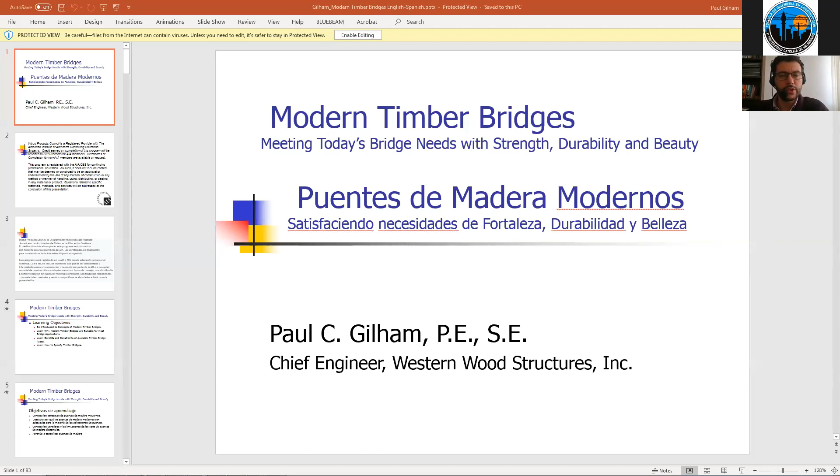Sorry, Paul, it's not sharing the screen yet. Sorry, I'm not... it's not yet. Okay, can you try again please? Okay, let's try this, screen share. Okay, good, can you see that? Yeah, yes, we can. Great. Now, do you see the full screen? Yeah, do you see it please? Not yet. Yes. No, no, not yet, it's not the presentation screen yet. Okay, I was afraid of that. F5, or, well, I have it on F5. I have two monitors, and the right monitor has the screen on it, but I think you're looking at the left monitor, are you not?

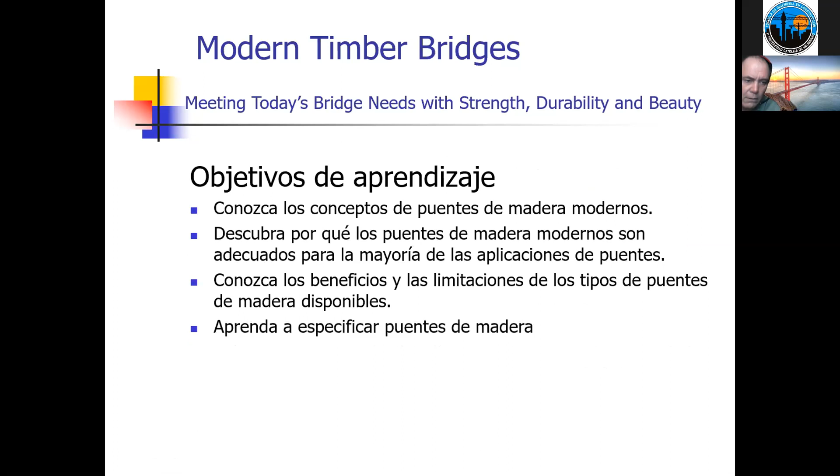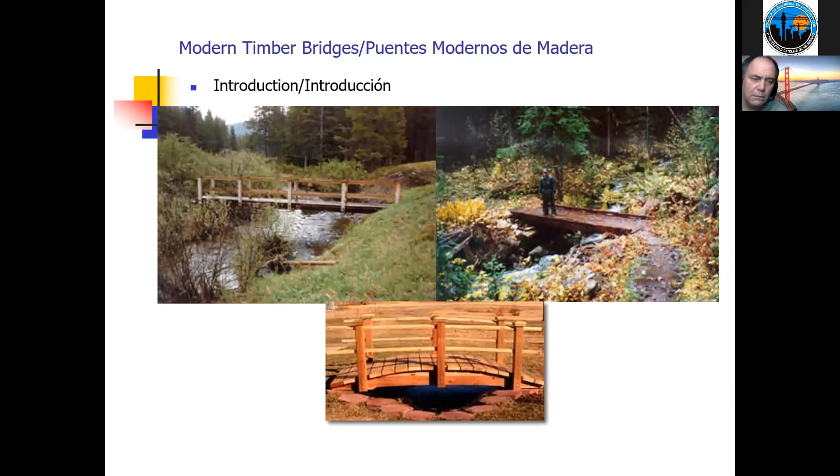The common perception of timber bridges is that they are limited to small trail bridges for light use, or a garden bridge ordered from a catalog. But several developments over the last 50 years allow us to go beyond these structures to bridges suitable for major highways. By developing new methods of construction and new materials made from our timber resource, a new generation of timber bridges has emerged that meets today's strength and longevity requirements for bridge construction. These are referred to as modern timber bridges.

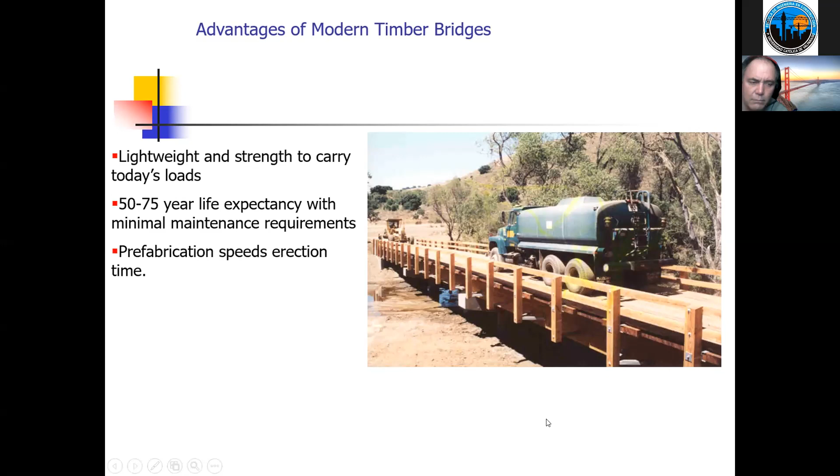Timber bridges have several advantages, such as a high strength-to-weight ratio, making them significantly lighter than bridges made with other materials. Modern timber bridges have a 50 to 75 year life expectancy, and we'll examine the procedures used to achieve this durability. Modern timber bridges are prefabricated before preservative treating, which greatly speeds erection times. These bridges are delivered to the job site like giant erector sets; the members are lifted into place and simply bolted together to form the bridge structure.

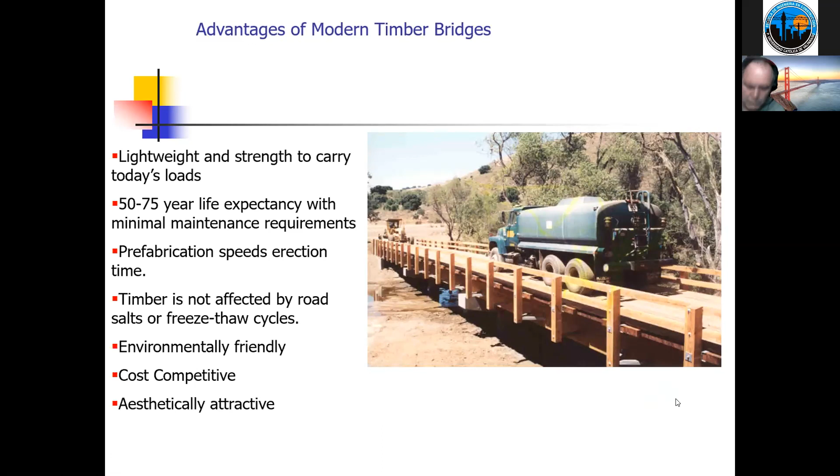Timber is not affected by de-icing chemicals, which can be corrosive and are not required, reducing maintenance requirements compared to other materials. Timber is the only renewable building material. In addition, the energy used to produce timber is significantly less than producing steel, and the amount of air and water pollution produced in manufacturing timber is far less than steel and concrete.

Timber bridges are competitive with steel and concrete on a cost basis, especially when the cost of smaller foundations is considered. No other building material has the inherent warmth and beauty of wood. The variation of tones and grain patterns make wood desirable for finishes, also enhancing the beauty of a timber bridge.

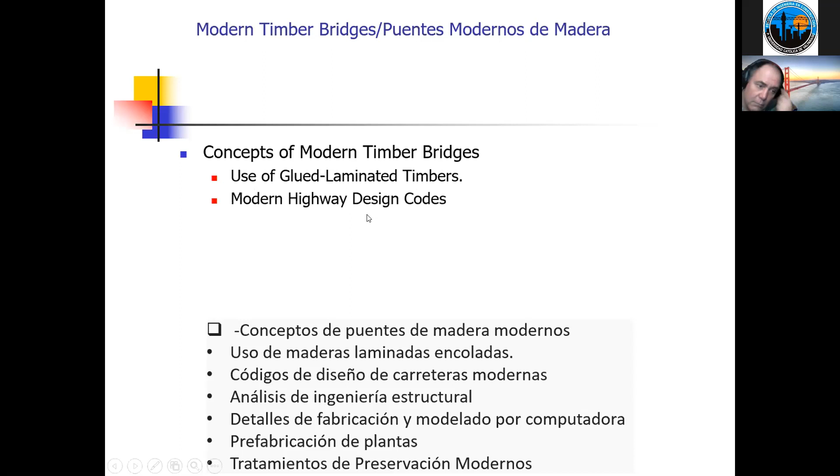There are 6 major improvements implemented in the design and construction of timber bridges that enable them to meet today's requirements for strength and longevity, while maintaining the charm and beauty inherent in timber construction. The first is the use of glue laminated timbers, or glulam. Glulam members are made with 50 millimeter thick laminations, between 100 and 300 millimeters wide, bonded together with waterproof adhesives to form longer members. These members are significantly stronger than solid sawn timbers.

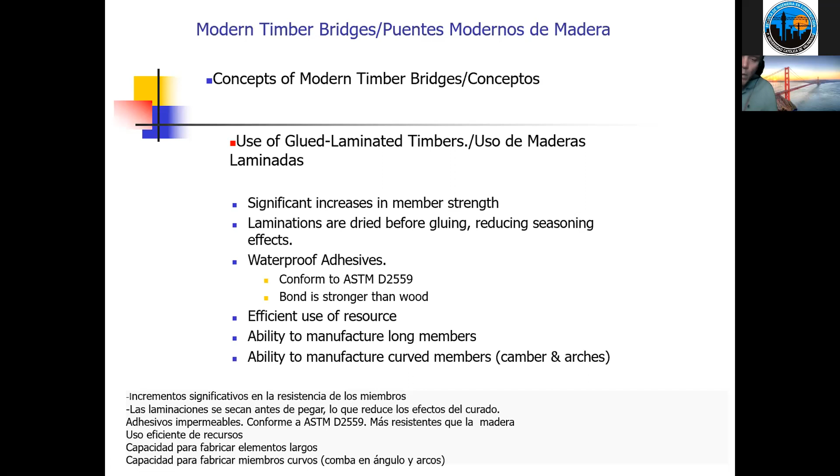We use waterproof adhesives that conform to standard D2559 of the American Society for Testing and Materials, and the bonds we make are actually stronger than the wood. It's an efficient use of resources, as the high strength material is only placed where the stresses are high. We have the ability to manufacture long members up to 35 meters, and the ability to curve the members to introduce camber or arches.

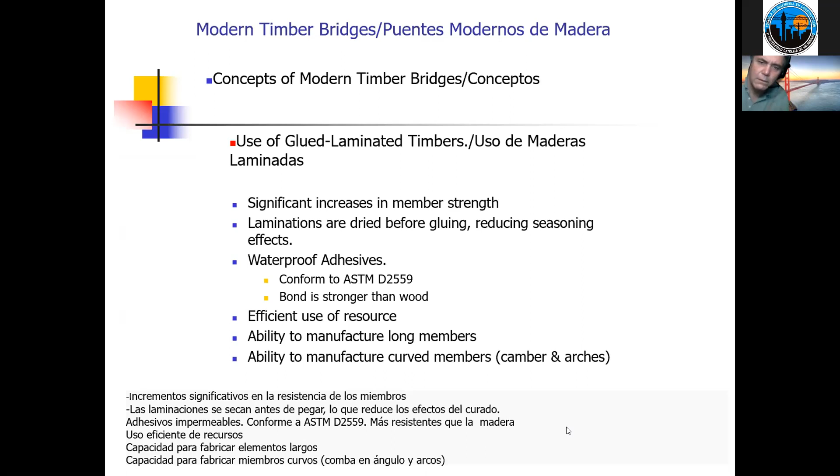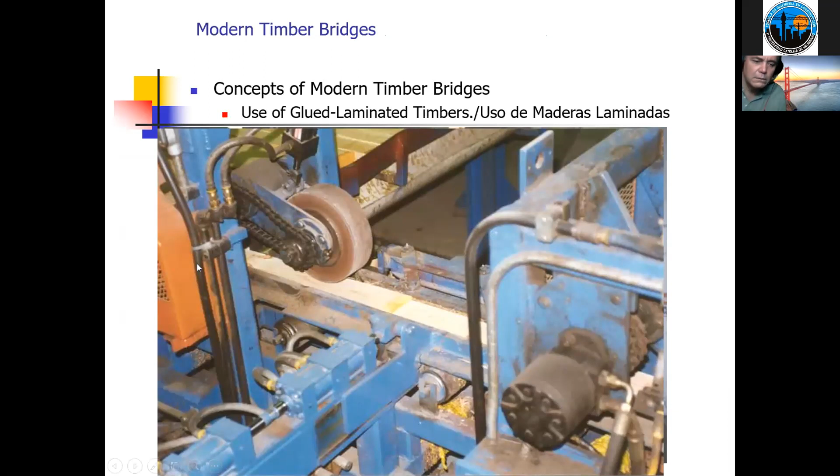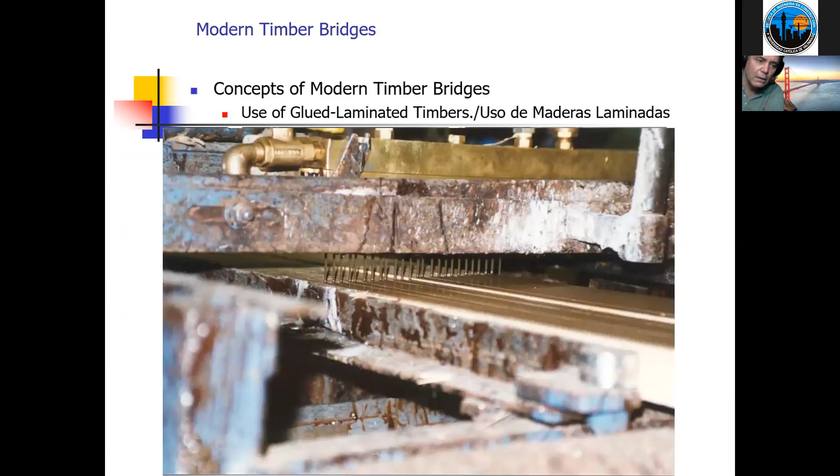In a glulam plant, the lumber comes in, is dried and graded. The individual laminations have a finger joint, cut into the end of the lamination. Those joints are assembled end to end to form laminations as long as the member needs to be. In the last step, face bonding adhesive is applied to the wide faces, and the members are locked up in clamps for the glue to set. Once set, the bonds are stronger than the wood itself.

Part of the concept of using modern timber bridges is that we use the same highway design codes as any other building material, so we're on a level playing field with both steel and concrete.

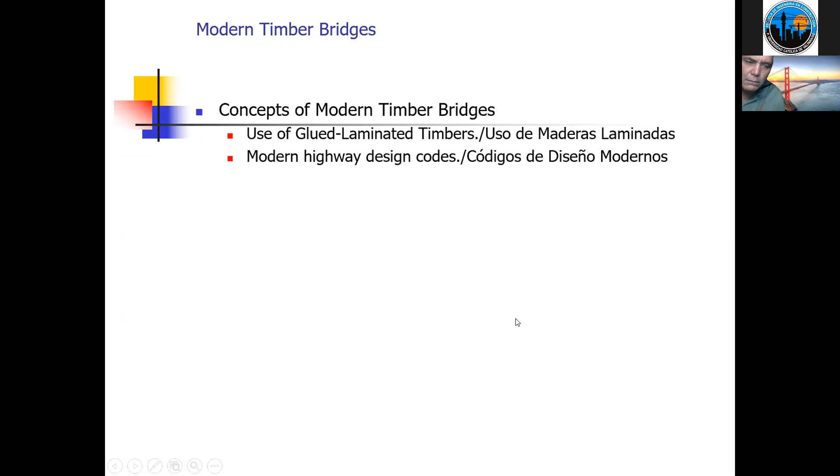In the United States, timber bridge design is governed by AASHTO, the American Association of State Highway and Transportation Officials, which currently uses the load and resistance factor design method, or limit states. Their design vehicle is the HS20 vehicle, which weighs 320 kilonewtons.

AASHTO also specifies how wide the lanes have to be, how loads are distributed to the individual structural elements, and things like wind and seismic loads.

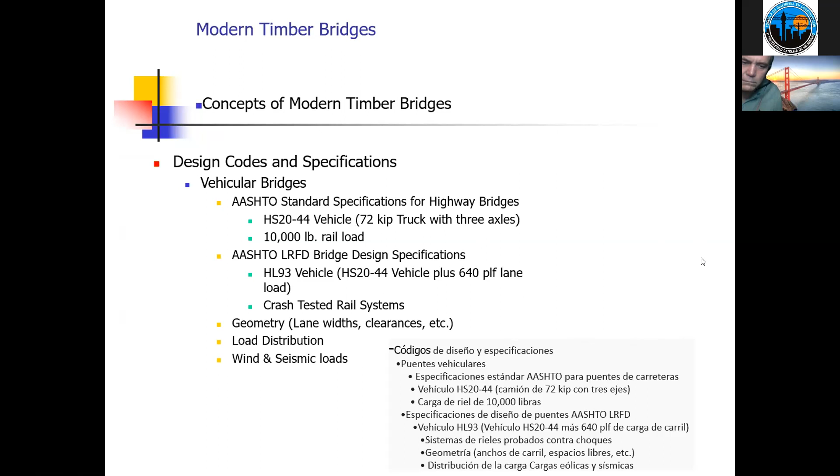So this is a truck on a normal bridge, which probably has 8 or 10 longitudinal girders underneath the pavement. AASHTO assigns a certain amount of the weight of this vehicle to a single longitudinal member, using the same distribution factors for wood as for steel or concrete.

One thing we're noticing driving down the freeways is that trucks just keep getting bigger and bigger. The standard truck is a 320 kilonewton vehicle plus a lane load of 9.3 kilonewtons per meter. That combination of lane load plus an individual truck accounts for the vast majority of loads applied to bridges, all specified in the AASHTO specification.

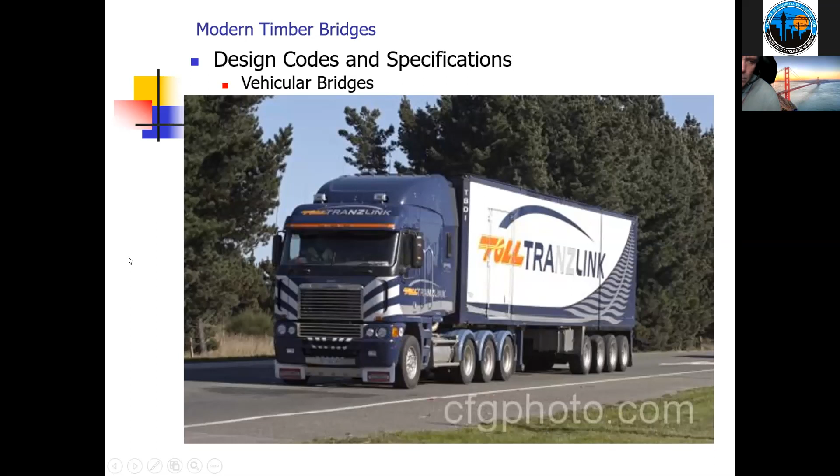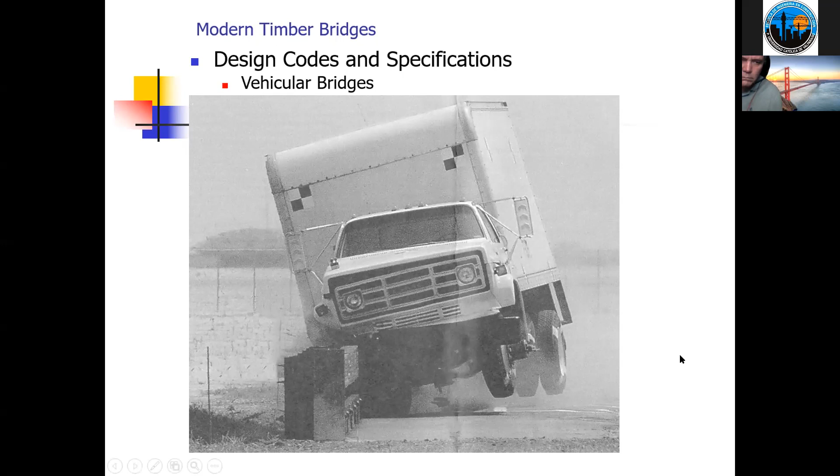Also required in the US for new bridges are crash tested rail systems. This timber rail system is designed to take the impact of a truck hitting it. Not only must it be designed not to break, but it has to have the right geometry so the truck doesn't roll over the rail, and when it reflects back into the road, it does not cross into oncoming traffic.

Not only are timber bridges used now for vehicle bridges, but also for pedestrian bridges. The AASHTO LRFD guide specifications for the design of pedestrian bridges is one of the two design specifications we use, requiring a 90 pounds per square foot, or 4.3 kilopascal, pedestrian live load.

Again, wind and seismic loading is governed here. And unless access is prevented for other vehicles, a 6 to 10 foot wide bridge has to be designed for a 10,000 pound truck. If it's over 10 feet wide, it has to be designed for a 20,000 pound truck. Plus, there are requirements for the rail heights, rail spacings, and the loading that the rails must withstand.

We break structural engineering analysis down into four categories. The first is the use of computer aided design, which allows us to optimize the design and greatly increase the effectiveness of our work.

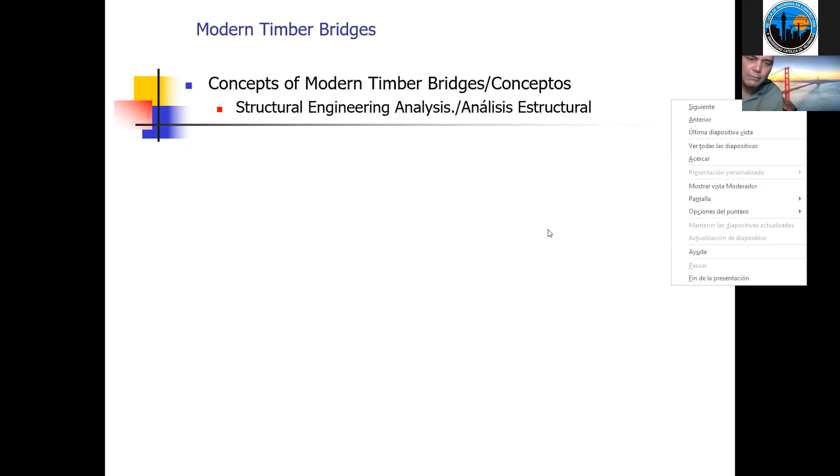What used to take 2 or 3 days now can be done in a few hours. Because we have that extra time, we can optimize the design by removing material where it's not needed and only putting the high strength material where the highest stresses are. We can also identify locations in the design that might have issues using the analysis software, which greatly reduces the time.

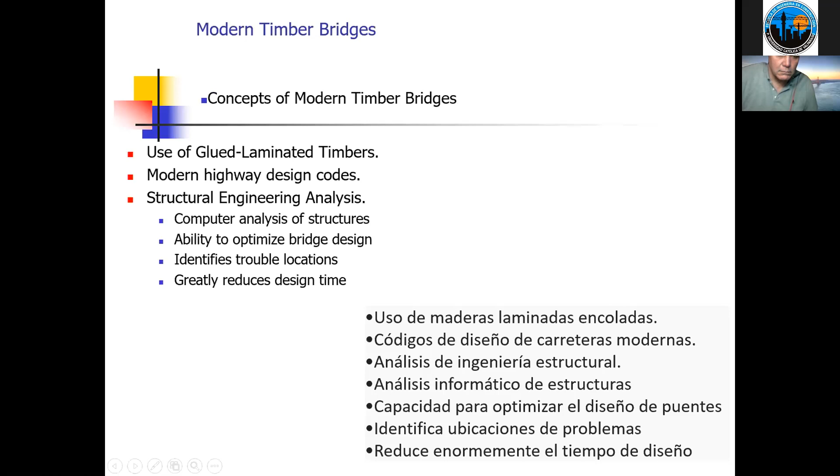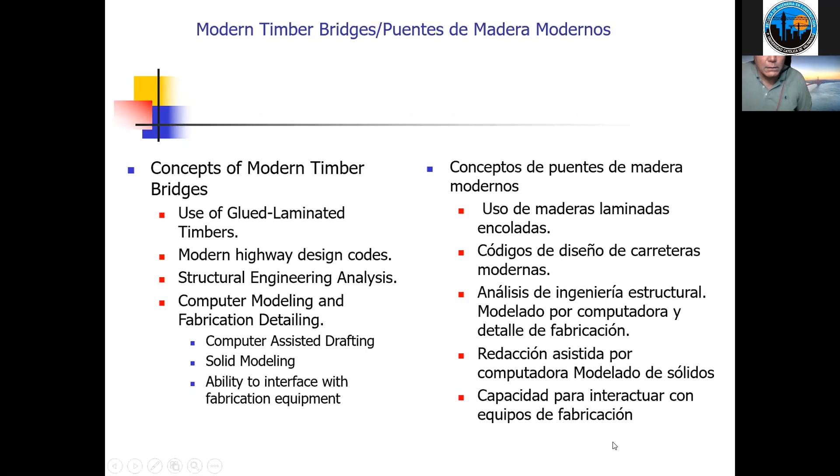We use computer modeling and fabrication detailing, including computer-assisted drafting and solid modeling of individual members, with the ability to interface directly with fabrication equipment.

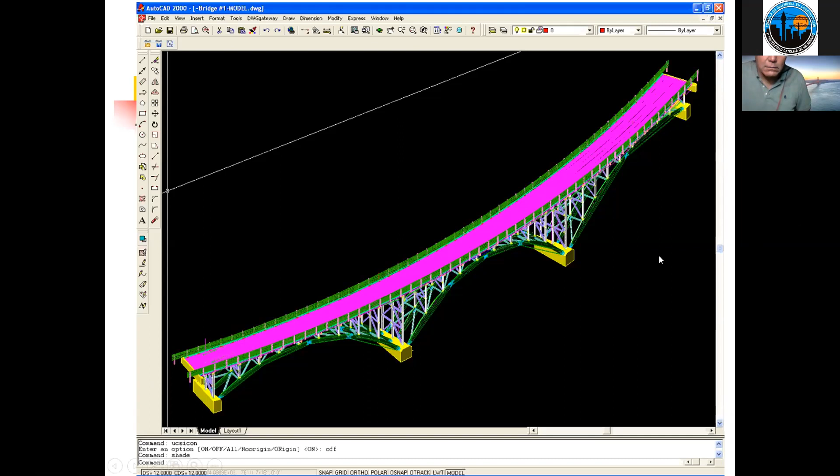If you look at this bent right here, we can extract that from the model, and we have the bent fully laid out.

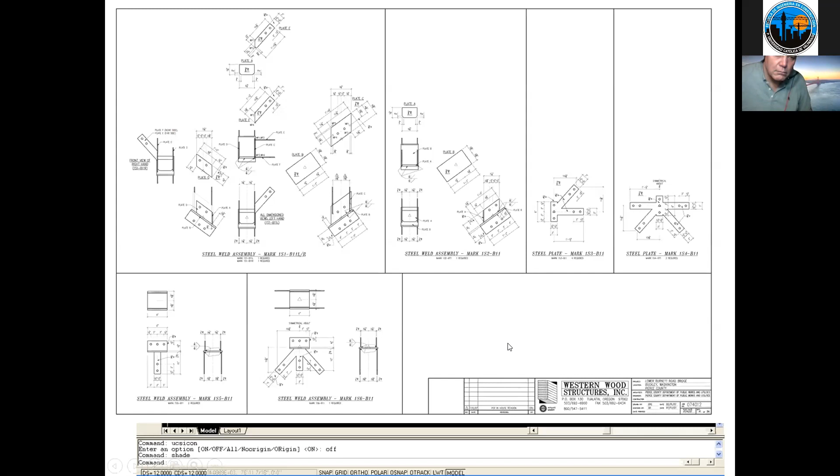So the next concept is plant prefabrication. Before modern timber bridges, it was not uncommon for a contractor to buy several truckloads of treated material, bring them out to the job site, and then cut them to fit the requirements at the job. However, when they did that, they broke through the treatment barrier and exposed untreated wood to decay organisms.

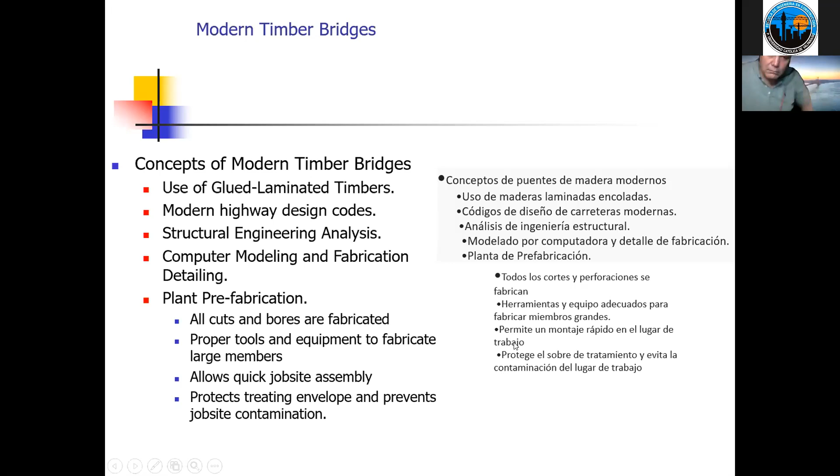So with plant prefabrication, all of the cuts and all of the bores are done in the fabrication facility using the proper tools to fabricate these large members. These members are so big that you don't bring a beam member to the saw and try to cut it. You got to bring the saw to the member.

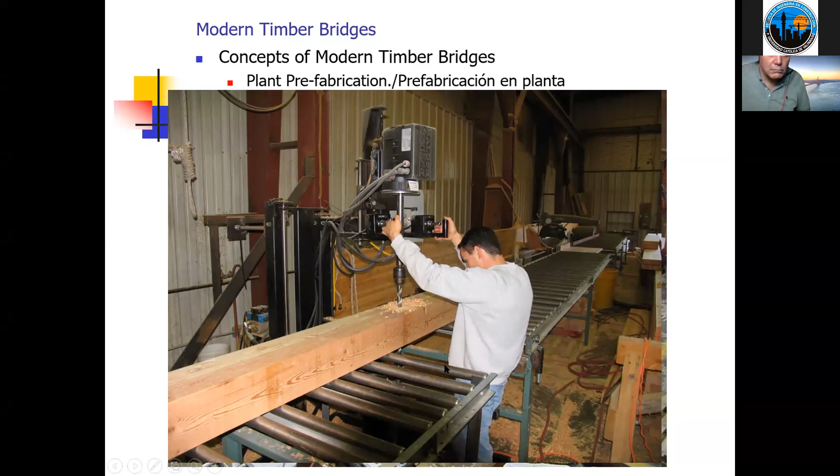Oops, wrong way. That's it, sorry. There you go.

Okay, in timber bridge design, modern timber bridge design, we are using modern preservative treatments. All of the treatments that we use are Environmental Protection Agency registered pesticides, and they are effective in the prevention of decay and insect attack, and they form a complete treatment envelope of each member.

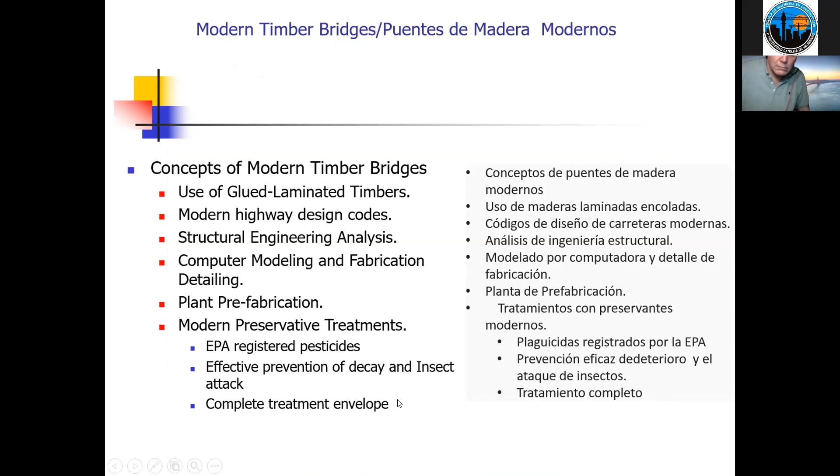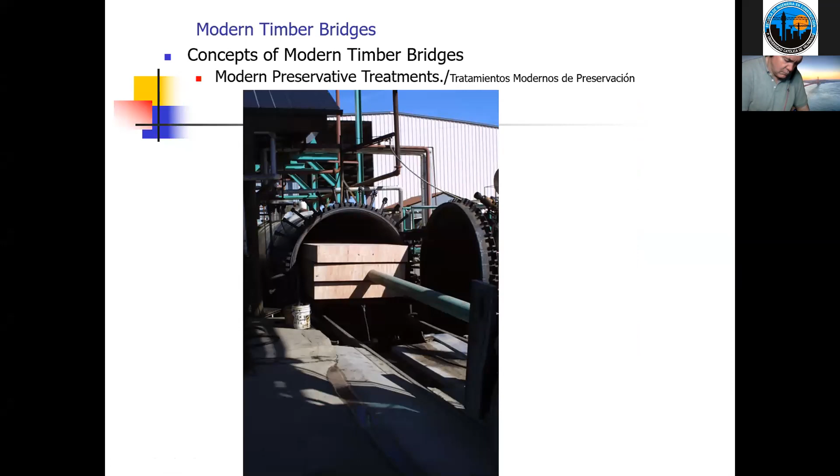This is loaded into the pressure treating cylinder, and several of these cars will be loaded with members and run in.

And then the pressure treating cylinder is sealed, and the preservative is pumped into this cylinder. And under pressure, the preservative chemicals are mixed with what's called a carrier. And the carrier can be water, it can be like a diesel oil, or it can be like a paint thinner, a very light oil. And those are put under pressure, and that pressure forces the mixture into the wood. And as it moves into the wood, the preservatives are designed to chemically bond to the wood fibers.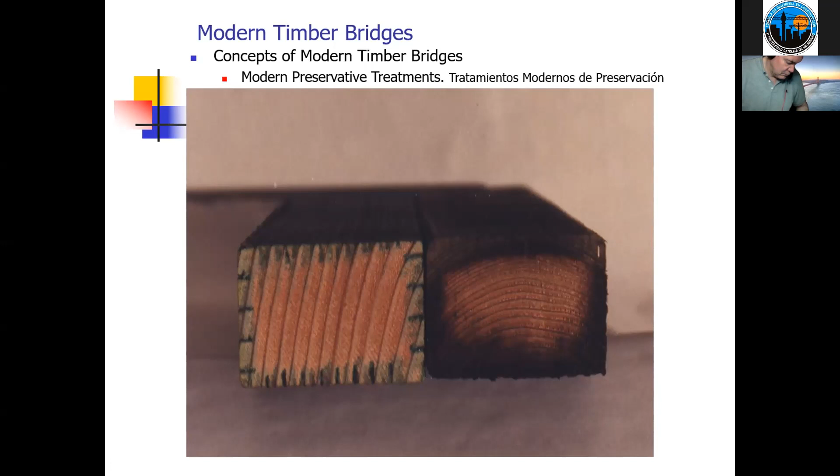This is a view of two different pieces of wood that have been pressure treated. The one on the left is a difficult to treat species like Douglas fir, and with these members, you can see these little knife cuts. That's called incising, and the incising allows the treating to go into the wood and then go with the fibers in the long direction and form a complete treating envelope. The member on the right is simply a species that treats more easily, so it doesn't have to have that machine incising.

Until about the 1990s, the treating industry was relatively lax about how much treatment they were putting in the members, and they figured that the more they put in, the better. But then they found out that they were having issues with the treating leaching out of the members and into the environment. So in the mid-1990s, this is 1996 on this particular cover, they came up with these best management practices for the use of treated wood in aquatic environments.

And what this included was chemical minimization, product cleanliness, inspection and rejection, fixation, which is the total binding of the treatment to the wood fibers, field installation guidelines, and then quality control and certification.

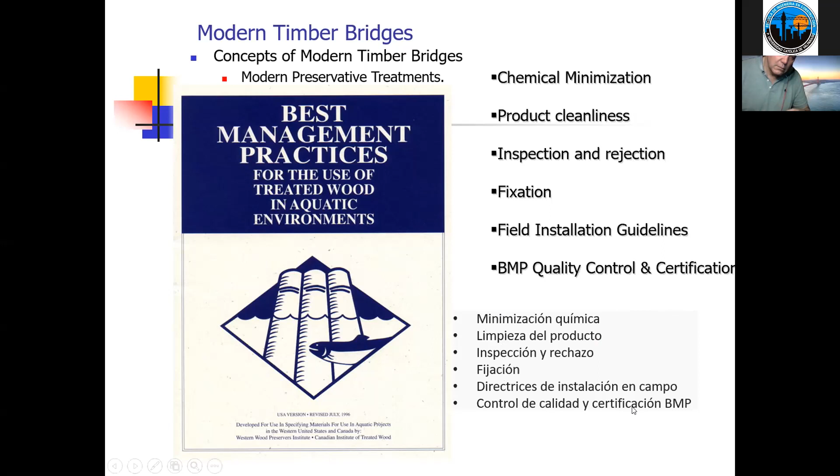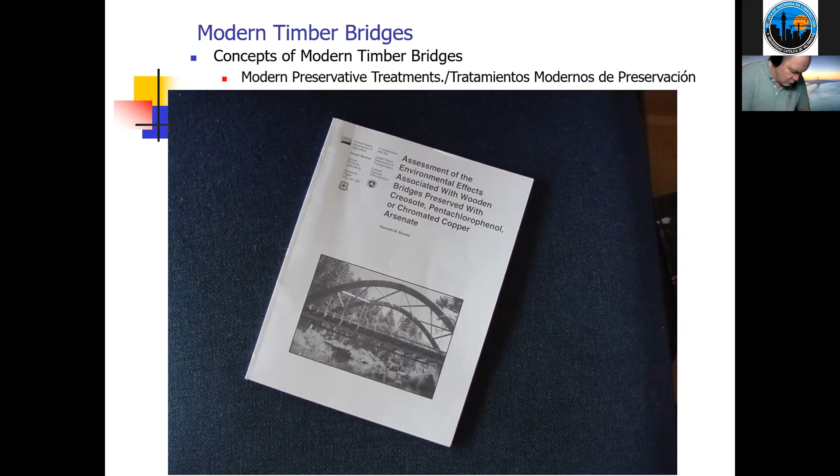Two recent studies by the U.S. Forest Service looked at two different conditions where treated wood was used over a sensitive aquatic environment. The first was this arch bridge up in Washington State, and the next was this very long boardwalk in the state of Oregon, again in a very sensitive wetland environment. The results of the first study suggested minimal environmental risks associated with preservatives lost from timber bridges. The conclusion of the second study was that no plant or animal species were significantly reduced by the boardwalk treatments.

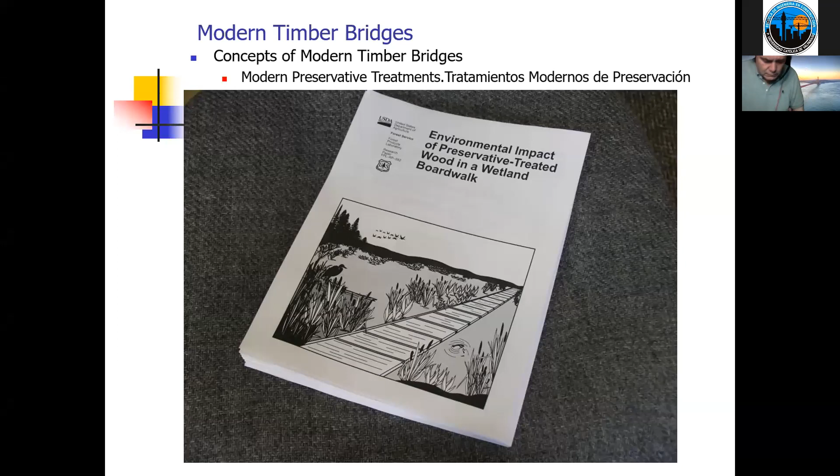So we're going to look at several bridge types, from shortest to longest, some specifically for pedestrian use and others for vehicle use. The first is boardwalks. Boardwalks are typically short bridges connected end to end, and they're used often in sensitive wetland environments where you don't want a lot of disruption of the soils.

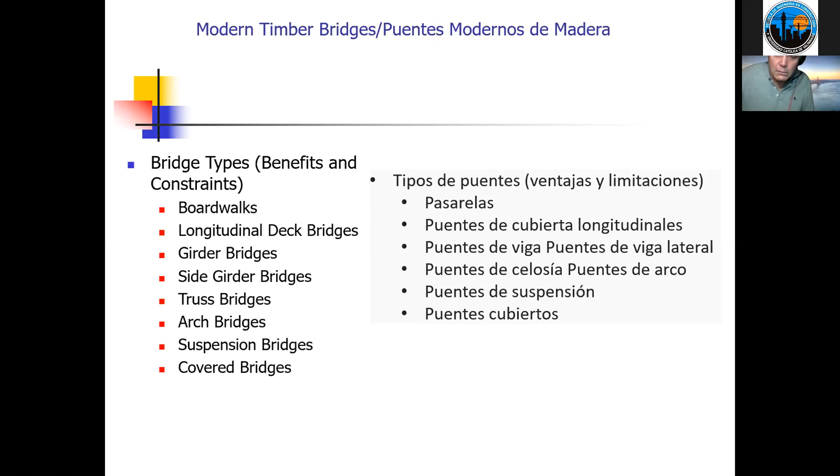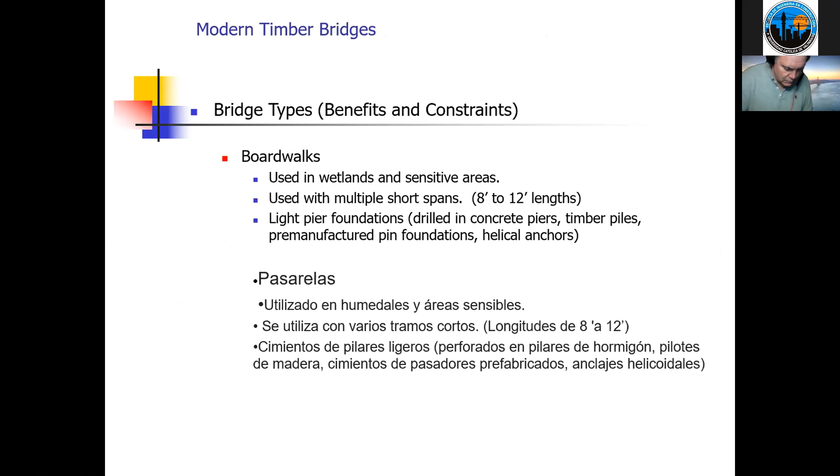The beauty of these is that with some care in the design, you can make these fit through a site that has many obstructions, like these trees. In this one, you've got this nice curved look.

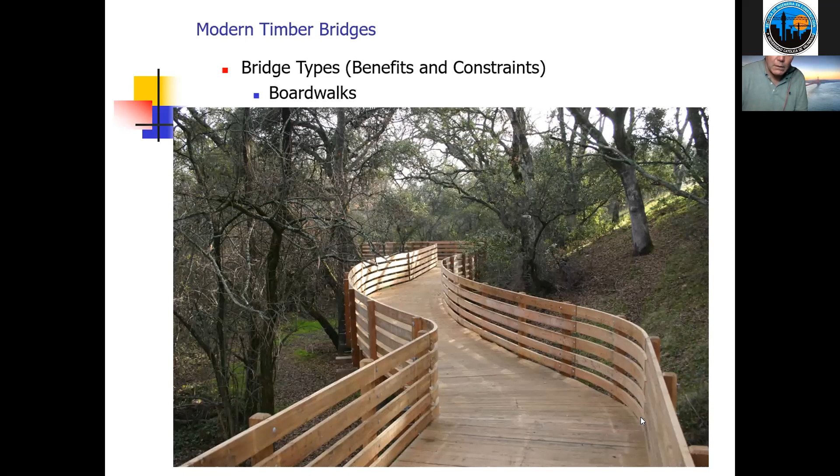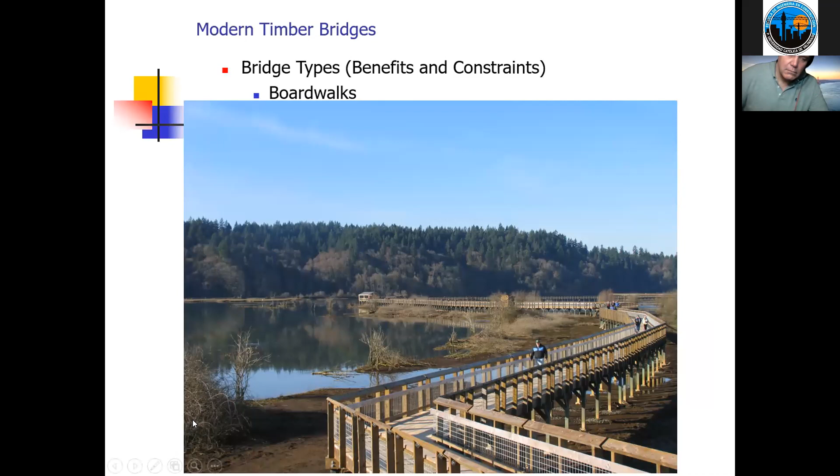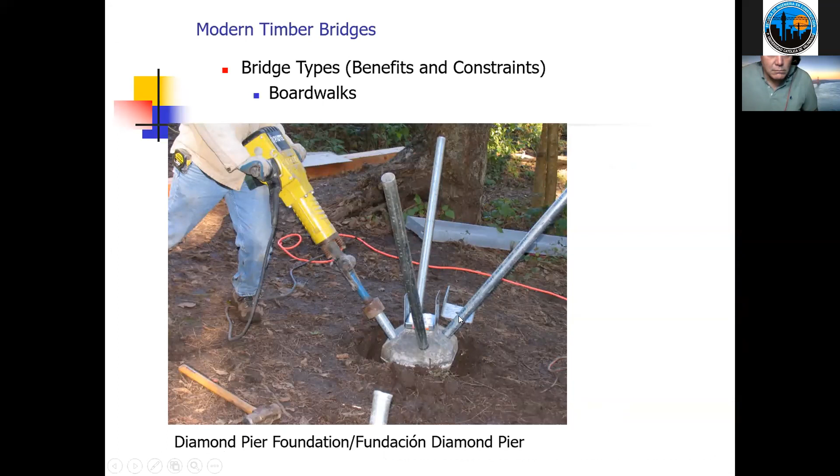Another method is these diamond piers. These pipes are inserted through a concrete block, and the pipes act as spread footings, if you will. These have very small disturbance, a couple of shovelfuls of dirt for each foundation only.

Next are longitudinal deck bridges. These are typically used for vehicular bridges, and can go from about 3 to about 12 meters in length. They have very low clearance requirements, are made from glue laminated deck panels, and have very easy installation.

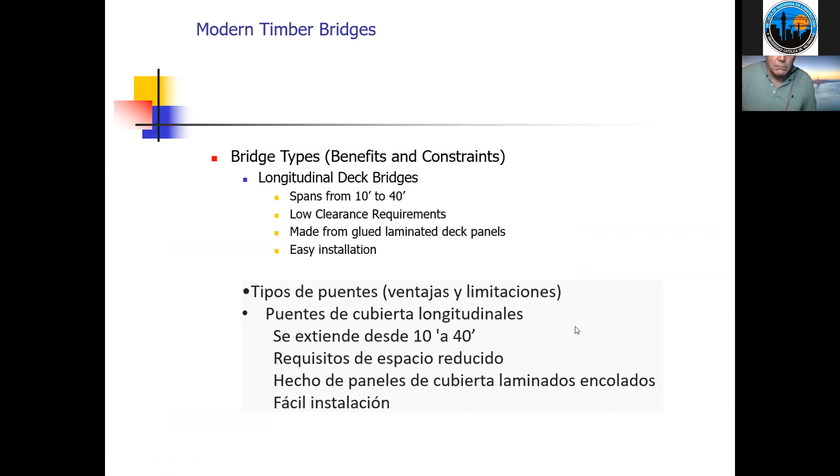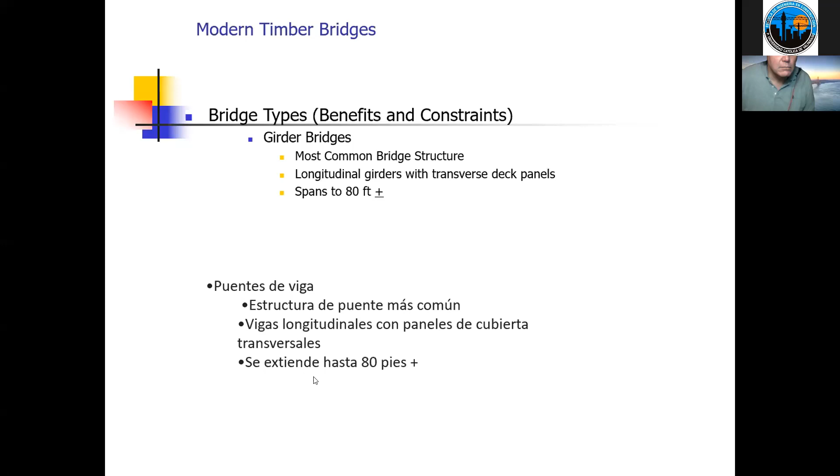Girder bridges are probably the most common of all bridge types. In them, we use longitudinal girders with transverse deck panels, and they are efficient up to about 24 meters or so. After that, we look at a different type.

Here is a pedestrian bridge that is a girder bridge. You can see the girder on the bottom spans from foundation to foundation, transverse deck panels on top of the girder, and then just a post and rail system.

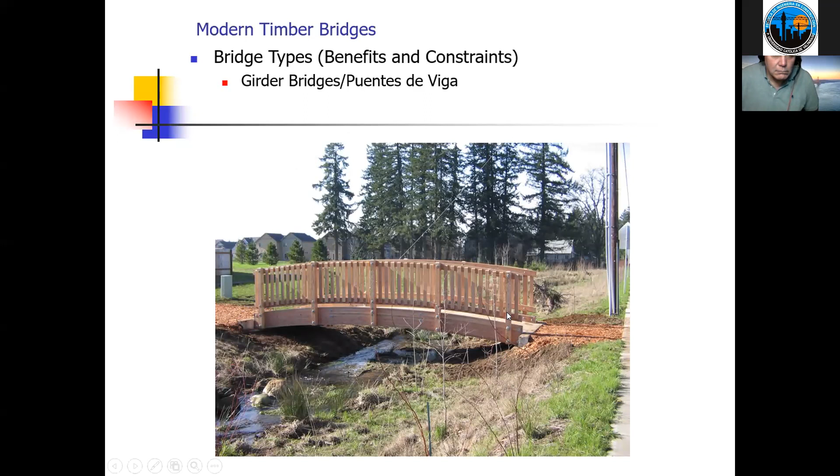This is a 3-span vehicular bridge.

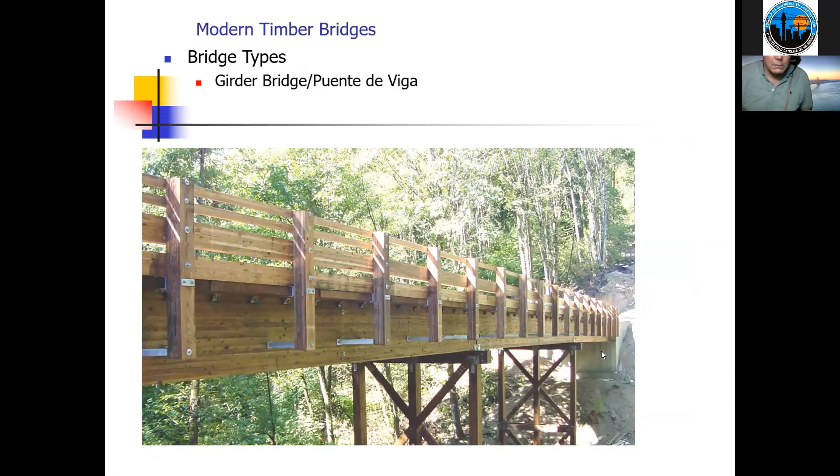This span in the middle here is about 18 meters, and on the outside, I think those are about 15 meters. And this is for a single lane vehicle.

As you can see, all of the connectors are pre-fabricated, in this case, these routes up here for the deck clips. The holes for these machine bolts are all drilled ahead of time, like out on the post, at the post bracket and so forth. So all the fabrication is done before the members are pressure treated. Around each one of these holes, there's quite a bit of pressure treatment because so much of the wood was exposed when the members were treated.

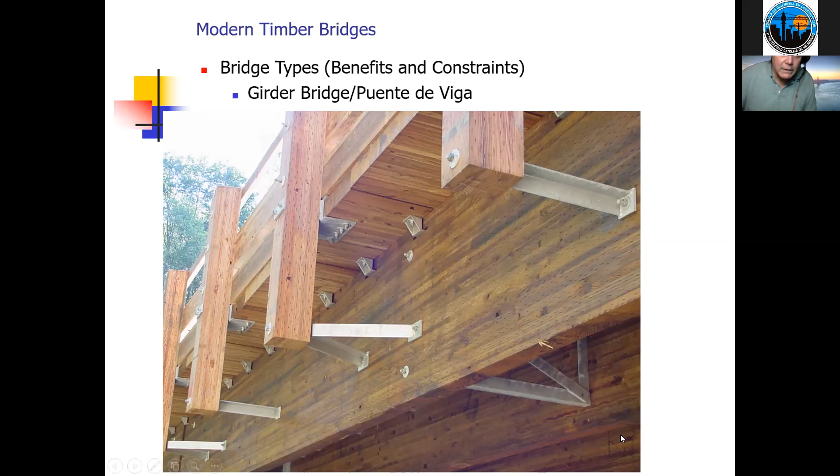The next type of bridge is what we call a side girder bridge. It can be used when the clearance below the bridge is very limited, like there might be a creek that does not have very high banks, or it could be a bridge that goes over a roadway. Spans up to about 25 meters.

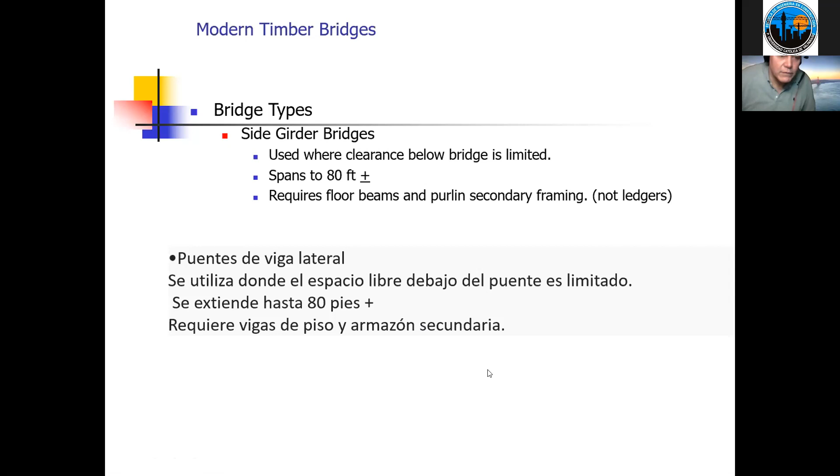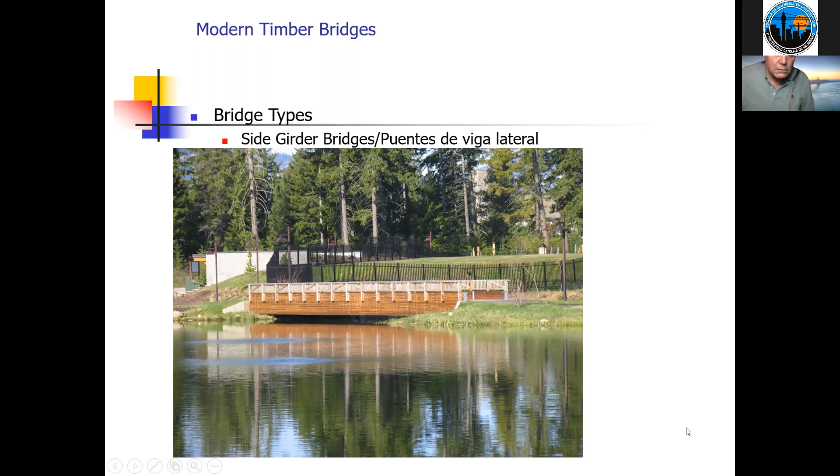Here's a bridge with very low clearance underneath the girders. You can see the girders are pretty tall. If the deck had to be attached to the top of the girders, you'd have to have a significant fill on both ends.

But in this case, you can see that the deck is placed down below the top of the girders. So the distance from the deck to the bottom of the girders is relatively small. That way you can maintain the clearance below the bridge that's needed.

Truss bridges, we use these when they get longer than about 85 feet, which is about 26 meters. These will go up to, actually we've gone 280 feet now - we've built these up to 85 meters long. The members are lightweight. There's significantly more fabrication and connecting steel. The erection procedures are more complicated, but we can make very long spans.

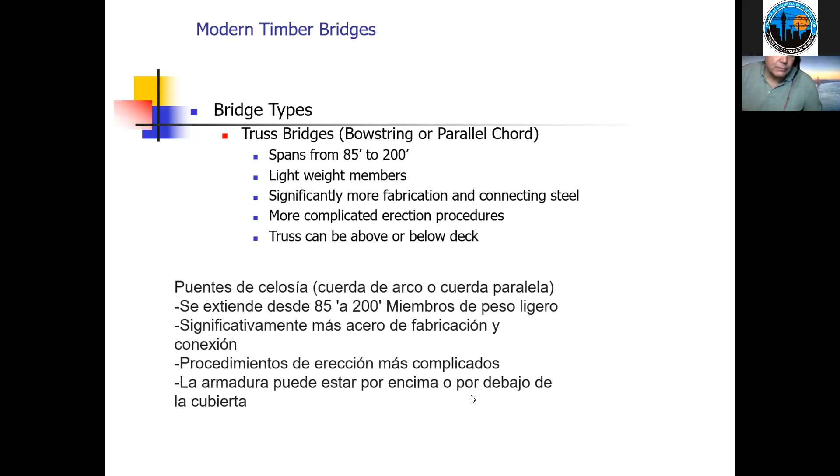This is a 30-meter bridge, we call this a pony truss. The truss, the top chord acts as the rail for this bridge. This one is about 30 meters long and about 2.5 meters wide.

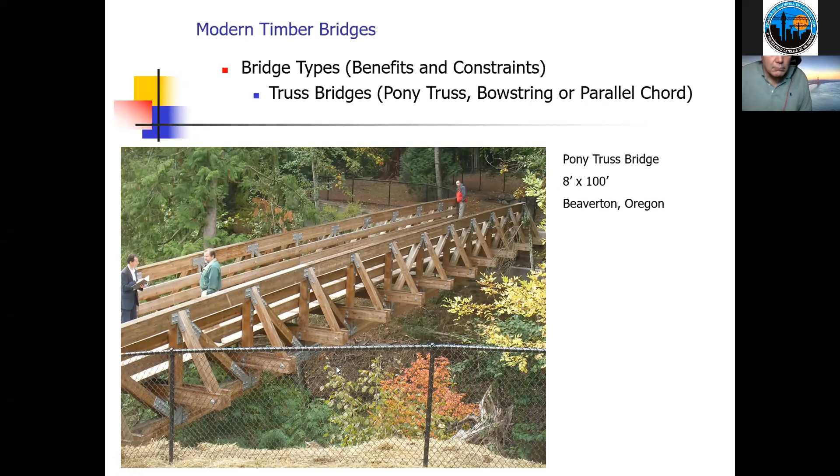This is a bowstring truss bridge, 135 feet long, which is 41 meters. Again, it's for pedestrians, and it goes over this roadway down below.

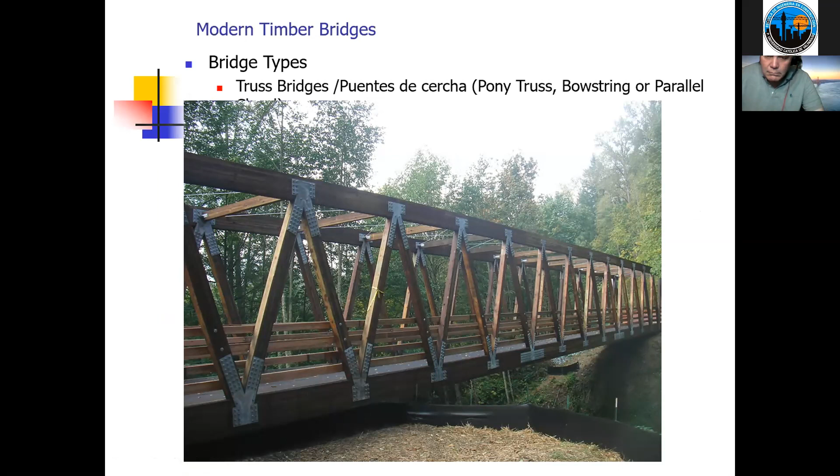Another type of truss bridge is what we call a parallel chord truss. As you can see, the top chord is way higher than the decking on this one. So we can brace the top chord in between the individual trusses, and we don't have to have any kind of knee braces extending out from the truss.

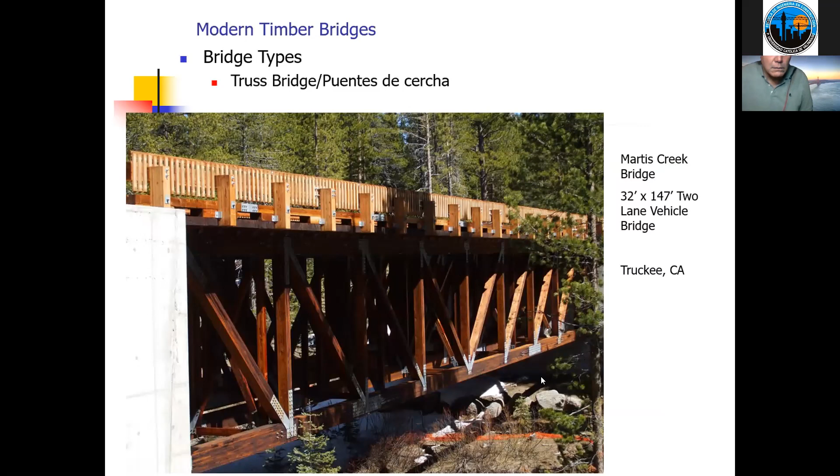This is another parallel chord truss. This one is underneath a bridge. This is in California, and it's 45 meters long, 2 lanes of traffic, carries vehicular and pedestrian traffic both.

This is the 280-foot one that I was mentioning, 85 meters long. It's up in Portage, Alaska, so it has some pretty severe environmental conditions - lots of snow, lots of wind. This particular one uses Douglas fir truss members, but the rails and deck system are made out of Alaskan yellow cedar, which is native to Alaska, and it's naturally decay resistant. So the deck and rail system doesn't have to be pressure treated.

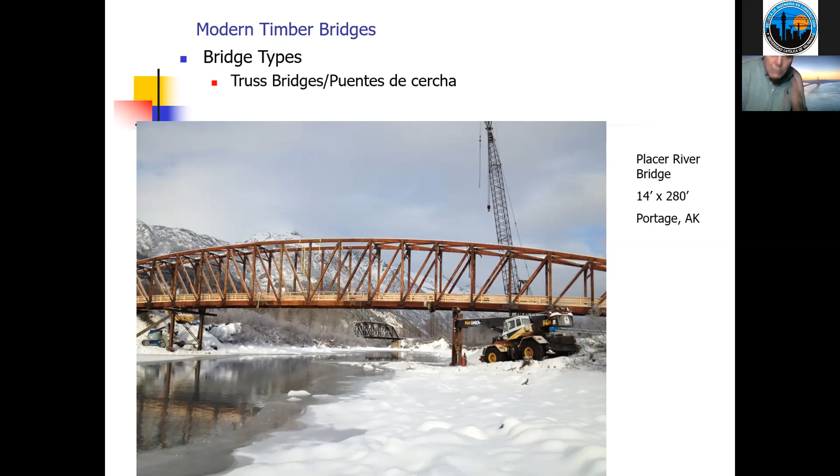Arch bridges go from about 30 meters to 60 meters. The members are larger than trusses. There's no actual truss action happening on these. They take less fabrication and connecting steel than the trusses, but the erection procedures are significantly more complicated because you're lifting longer, heavier members. Again, the arches can be above or below the deck. And because arches have an outward thrust on them, the foundations can be more complicated.

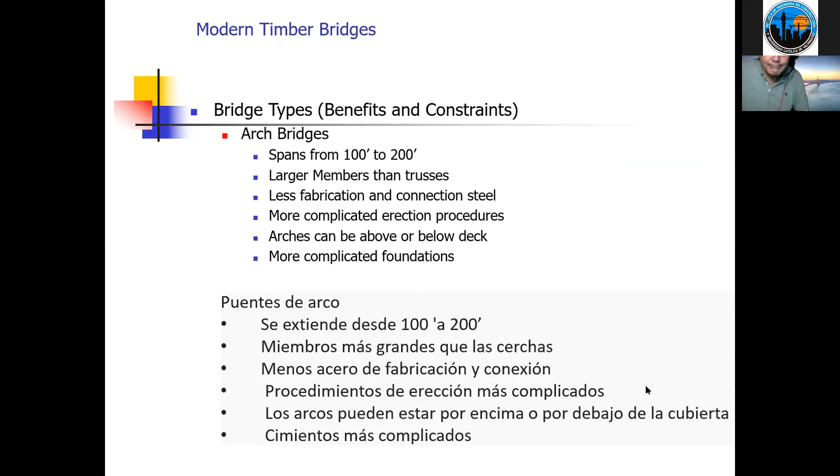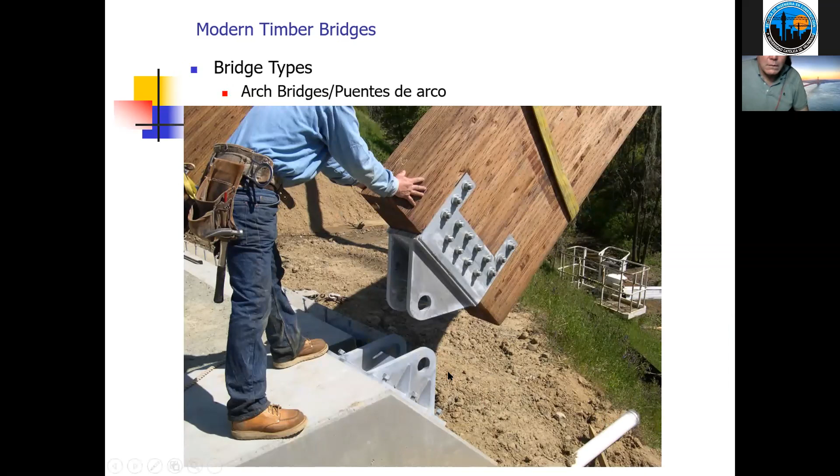Just real quick, a couple slides - you can see the heel assemblies here. He'll be bringing these two holes together and driving a pin through. There you can see the pin already assembled.

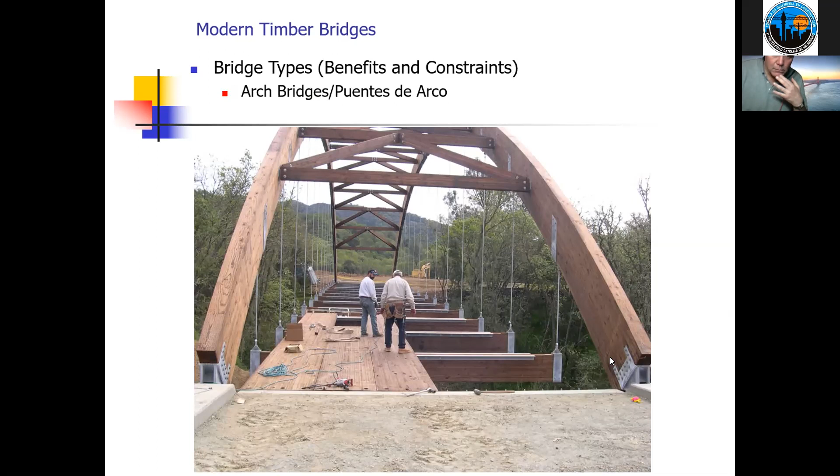We have vertical hanger rods, horizontal floor beams, and then we're using a longitudinal deck system for the decking. And the decking is multiple span. You can see the one on the left and the one on the right is a 3-span member, and this middle one is a 2-span member.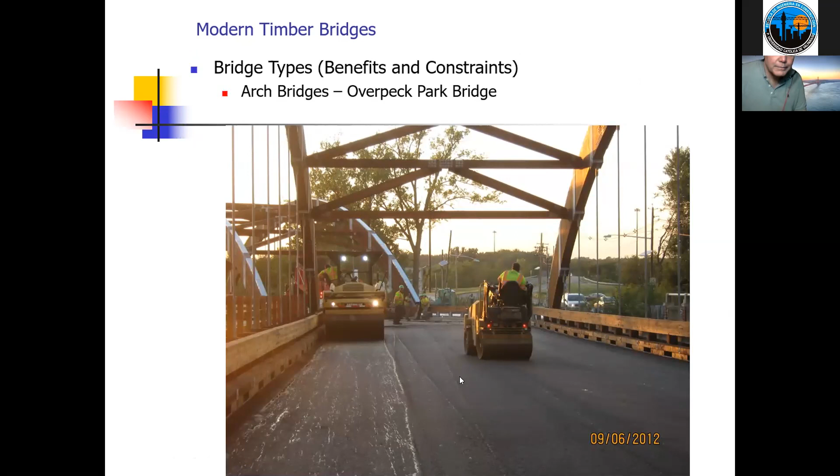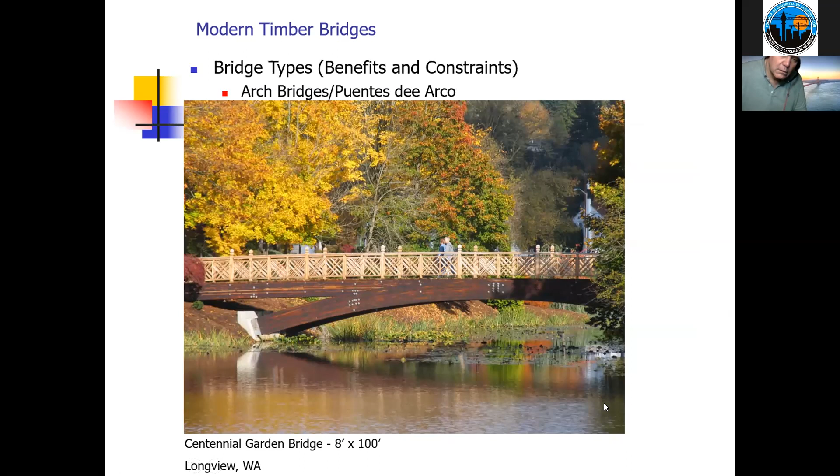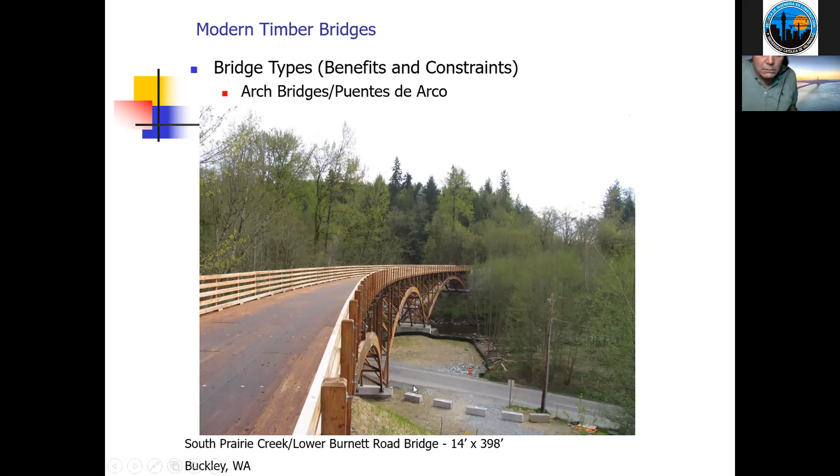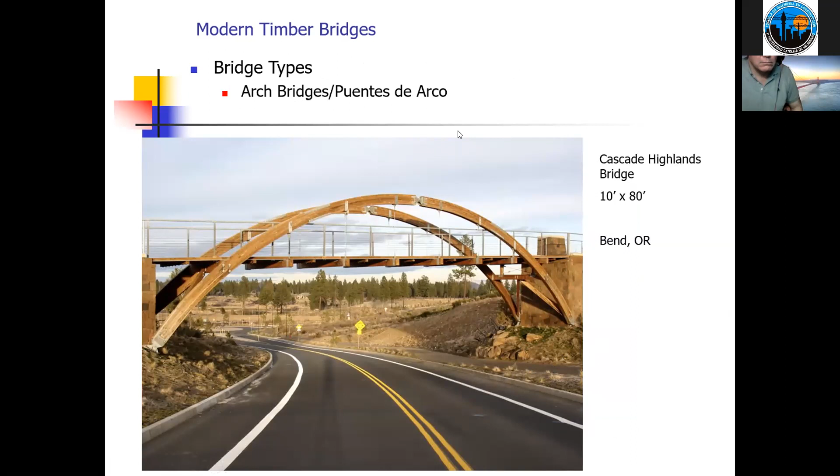Suspension bridges, either catenary or cable stayed, can go up to over 400 feet long. We've got one that I'll show you that's 475 feet. The members are very small. The cable and tower designs are significant, and you have to have a cable anchorage to the foundations for the longitudinal elements.

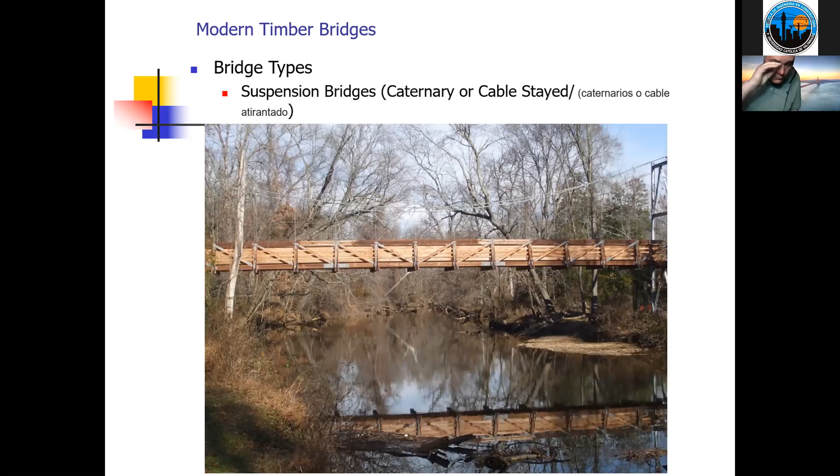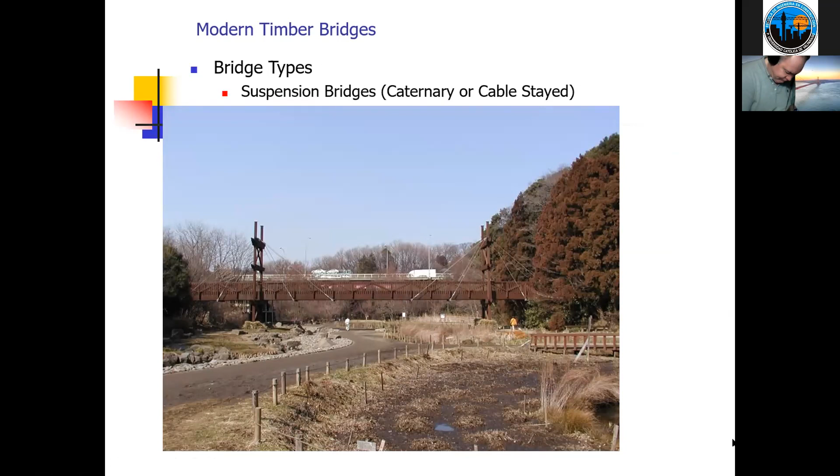This is a pedestrian cable stay bridge in Yamato City, Japan, and it's 53 meters end to end.

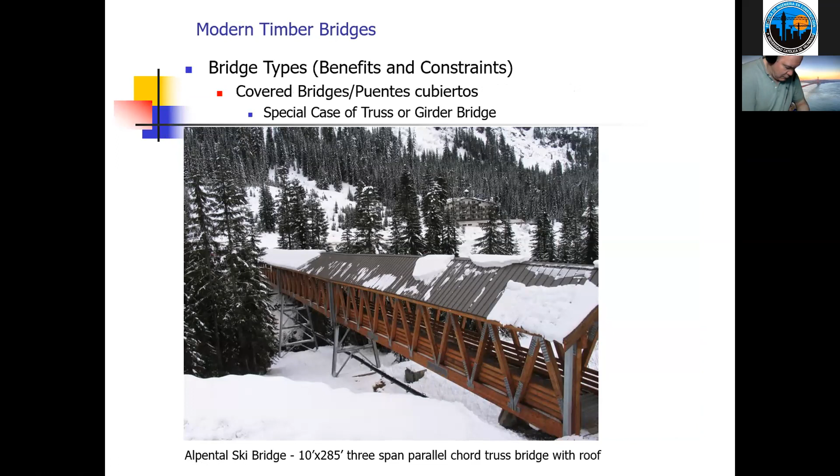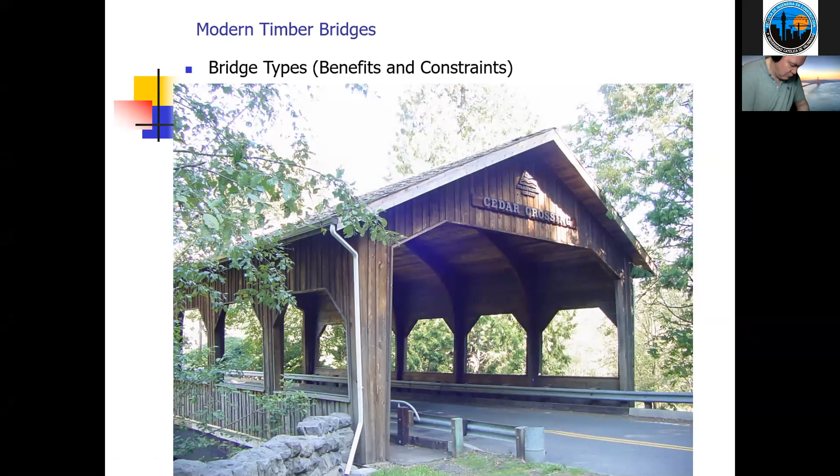Here's another vehicle bridge with a parallel chord truss, a walkway on the outside, and vehicles down the middle.

When you specify a timber bridge, things to include are the length—whether it's a clear span, center to center of abutments, or out to out—and you've got to consider scour potential, 100-year flood elevation, and stream protection when determining your length. The width is based on anticipated traffic. It's good to determine what building code will govern before you start designing, because if you design in one code system and the approving agency uses a different one, you'll be designing it again.

You can choose your bridge style—we just looked at several of those. You can change the rail configuration a little, add architectural features. We recommend a pre-qualified bridge supplier who will supply calculations and shop drawings stamped by a professional engineer. We require certificates of conformance for all materials—the glulams, the steel shapes, the hardware, and the preservative treatment. The foundation design can be done by a consultant or the bridge supplier.

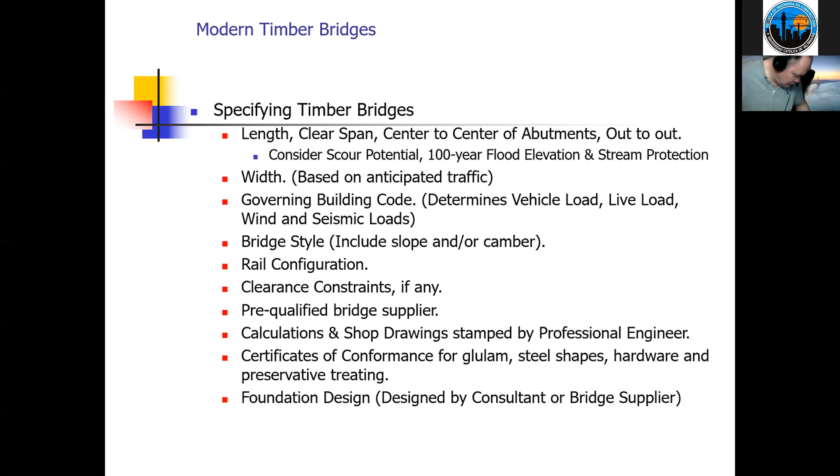So in summary, modern timber bridges combine the use of glue laminated timbers, the most recent highway design codes, computer-assisted analysis and detailing methods, and environmentally appropriate preservative treatments to provide structures capable of carrying today's design loads and durable enough for a 75-year life expectancy. We looked at several types of bridges and talked briefly about how you specify one—what's required to specify a timber bridge.

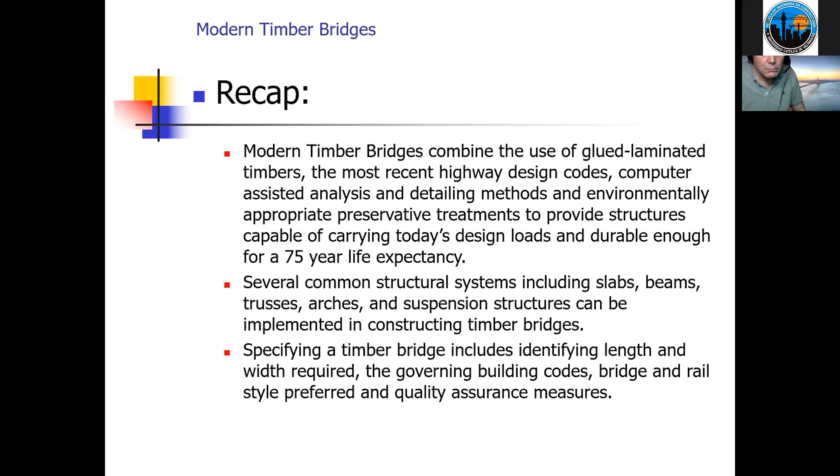Thank you, Paul. It was a really great presentation, an overview of all bridge types, this kind of timber bridge, the different typologies. That's very useful for Chile and I suppose also Latin America, because you can show the different alternatives we have to design and build bridges, not only our traditional girder and slab bridges. So we have several questions, let me start with a question from Vladimir Pasmiño.

He asked about the nominal resistance of the laminated wood for compression and also for tension. Do you have that? The allowable strength for wood is established by the trade organizations. They run a number of tests for each grade of wood, and then they assign the allowable stresses based on the test results. It's an ongoing process, and it has a lot of statistics in it.

So a steel beam is usually what we call a W shape, some people call it an H shape, so you have a flange top and bottom and a web. The design of the steel beam optimizes the use of the resource by concentrating most of the steel in the flanges. In wood, we do that a little differently. We put the high grade members where the tension and compression stresses are, and in the middle of the beam where the stresses are lowest, we use the lowest grade. So in a sense, we're making an H beam just like steel, but we do it by changing the strength of the material, not the size.